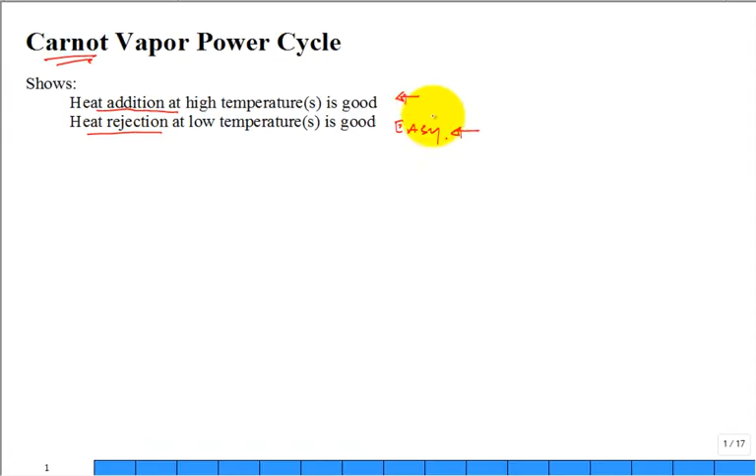But the other one, how you can bring in heat at high temperatures, is a theme that's repeated. And this is where a lot of innovation and adaptation of the cycle comes in. So it's a little harder, more opportunity there. Last time I talked about bringing in heat at high temperature, and the one easy way is to increase the boiler pressure. Increasing the boiler pressure increases the temperature at which you're bringing heat into the working fluid. This has been known for a long time.

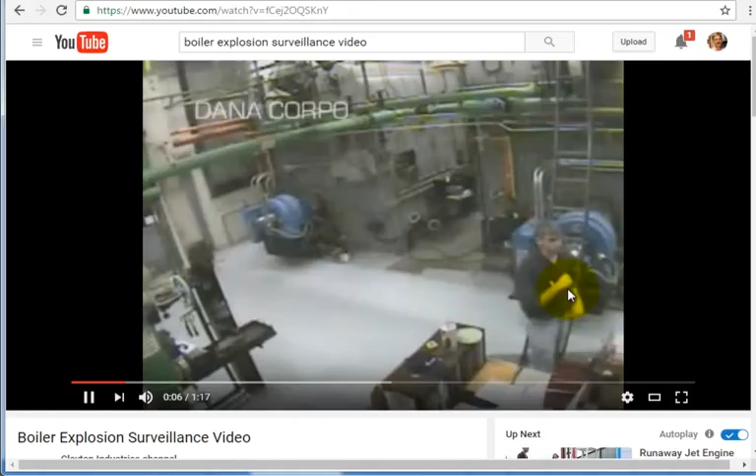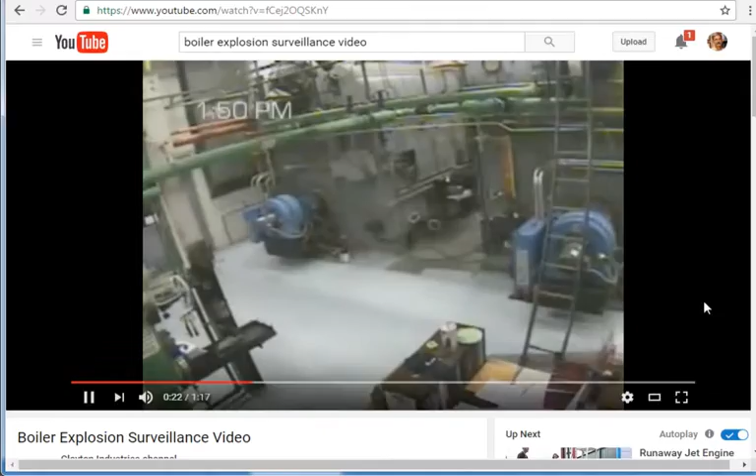Surveillance video. And we'll watch this one. So it's a fire tube boiler explosion. This worker, he's about ready to go to lunch. Hurry up, buddy. Yo-ho, it's time to go to lunch. That boiler's right behind you. He looked at the clock and he is out of there in the nick of time. There was no loss of life. There's the explosion.

And of course, some news video surveillance, I think, is going to come on. It's only a 1:17 video. And there's a side view of the factory, the plant. The safety feature had been disabled. A lot of engineers went and found out why that happened. Yeah, it had been manually overridden. And then, so here's some pictures of it blowing. Let me see. The destruction.

Stop right there. That's the lid on the end of the boiler. I couldn't pick it up. That's where it ended. The other end was shooting through the factory and went elsewhere. But I've read the report on this. Shattered windows in the parking lot, vehicles covered in dust, blown over tree. Oh yeah, if you buy their steam generator, that wouldn't happen. All right, let's jump back here.

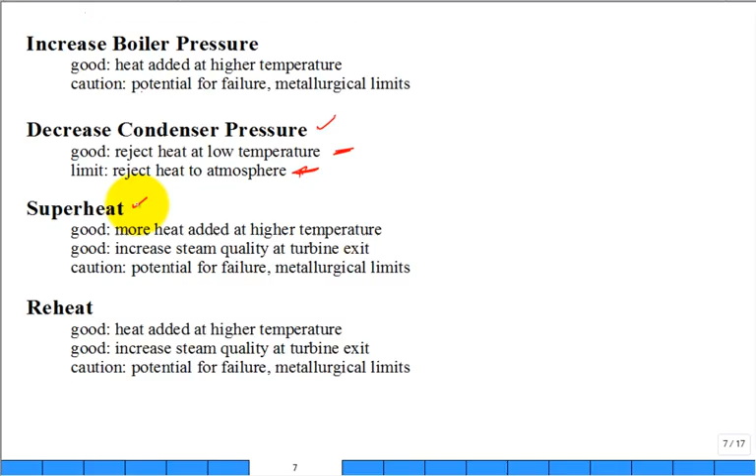So when you can, increase the boiler pressure. That's good. You're able to bring in more heat at higher temperature. What's the caution? You'll see it often. Metallurgical limits. And you have steam at high pressure. It's dangerous, and people have known that. Decrease the condenser pressure. Well, you have to reject the heat to the atmosphere. So although it's good, you keep it as low as possible, but you have to reject heat to whatever the atmosphere temperature is.

The next feature to improve performance is superheat. So on our temperature entropy diagram, we had stopped putting in heat when it becomes saturated vapor. There's a practical concern. When you expand it, even through the best turbine, you get kind of a low quality steam. So 20% or 30% will be in the liquid state, meaning liquid droplets rushing with the vapor. And that's bad on performance for your steam turbine. So what you do is you continue at that high pressure and you superheat. If you superheated it and then expanded it, then it would be better on the turbine.

So from a practical point of view, it's good for the turbine. Increases the steam quality at the turbine exit, so no little water droplets. And it's good because you're adding more heat at higher temperatures. That's good. Caution, there's even more of a potential for metallurgical failure and explosion.

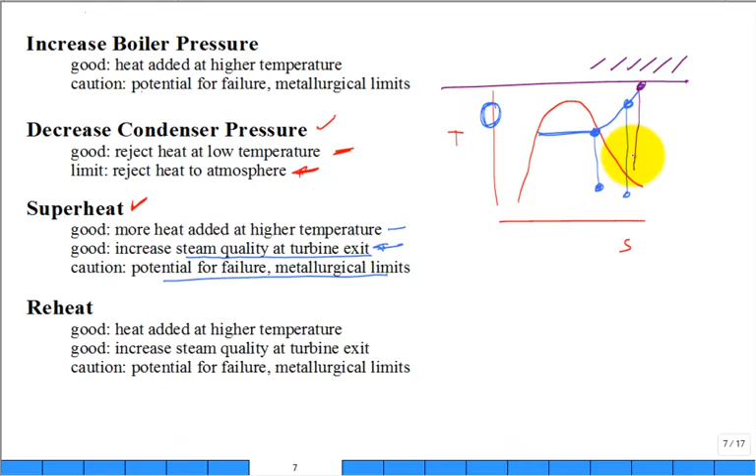And then the next one is if you really have a limit, like don't go beyond here. Well, then bring it up so far and then expand it, but maybe stop the expansion at an intermediate pressure, reheat it back up and then expand again. That's called reheat. So you can see some of the enhancements already, superheat and reheat, to bring in more heat at high temperatures into the working fluid.

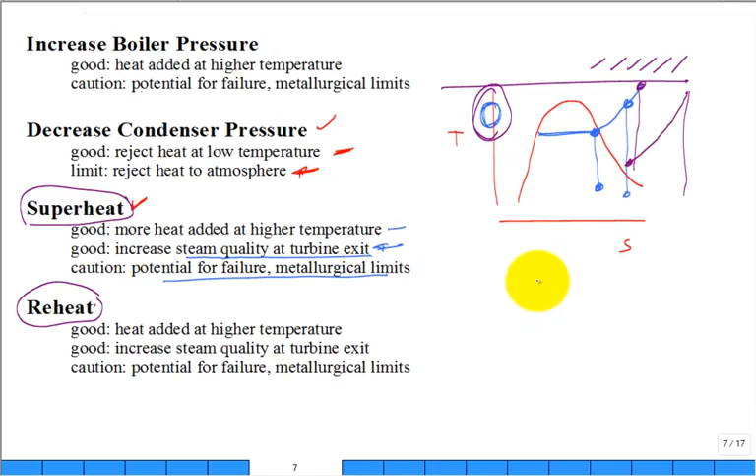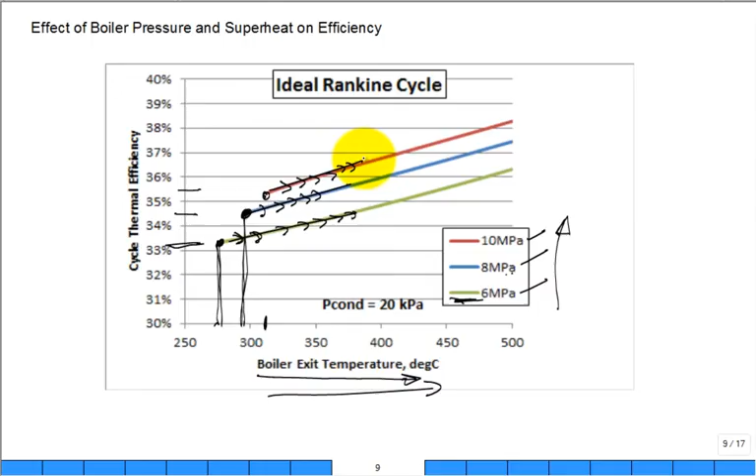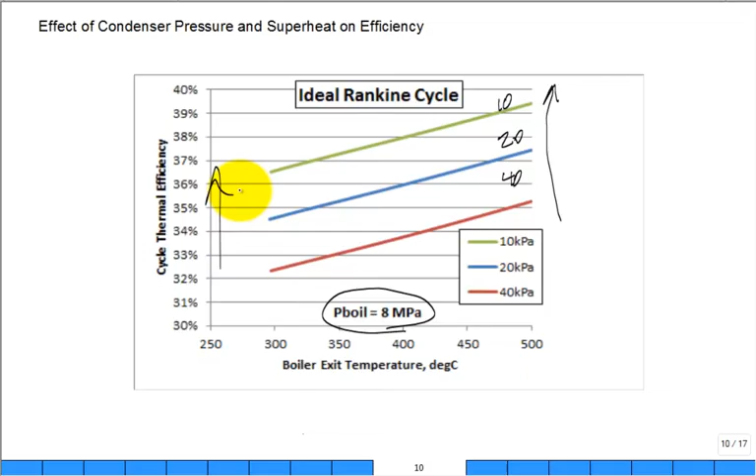You can do the same thing playing with the condenser pressure. Make the condenser pressure low. This is the 10 kilopascal, 20 kilopascal, 40 kilopascal, all for one boiler pressure. And you can see that it improves the thermal efficiency, but you're usually stuck. What is the temperature of the lake or the river that you're going to dump the heat to? And then reheat. Reheat, you have 2 turbine stages.

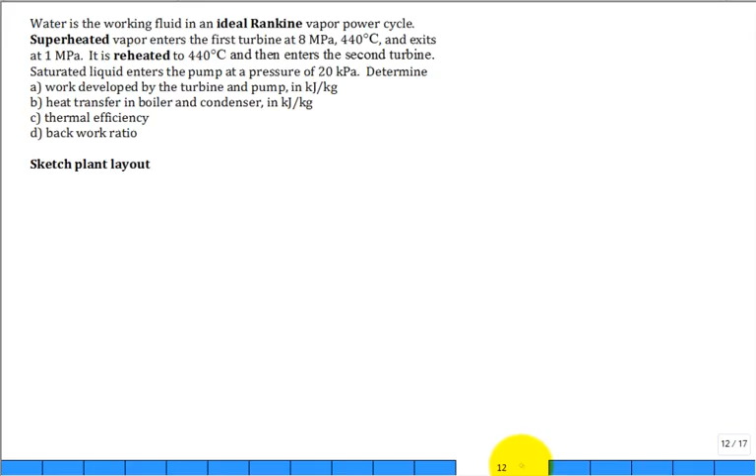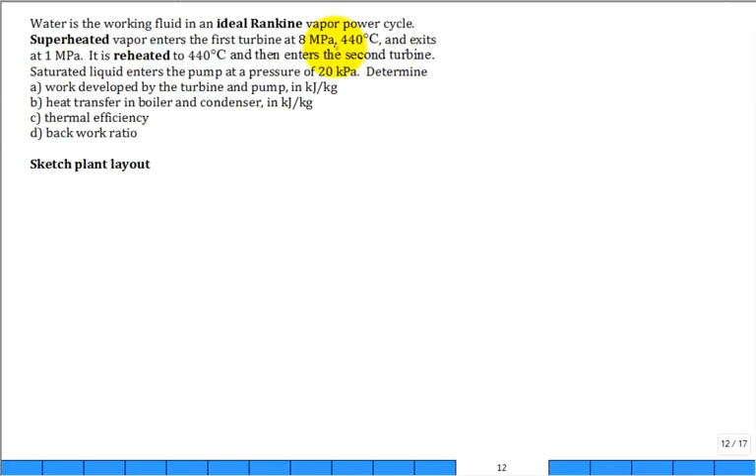Let me work through this problem right here. So I'll read it first. Water is the working fluid of an ideal Rankine vapor power cycle. Superheated vapor enters the first turbine at 8 megapascal and 440 degrees C, and then exits at 1 megapascal. So you're going to have 8 megapascal, 1 megapascal. It's then reheated and then enters the second turbine. So you have a first turbine and then the second turbine.

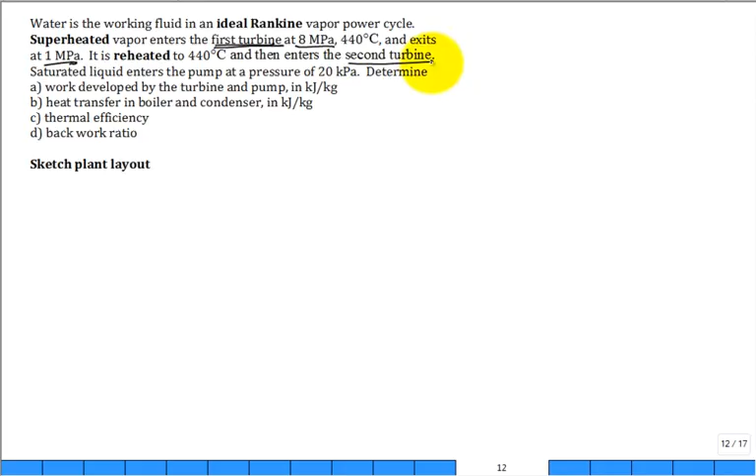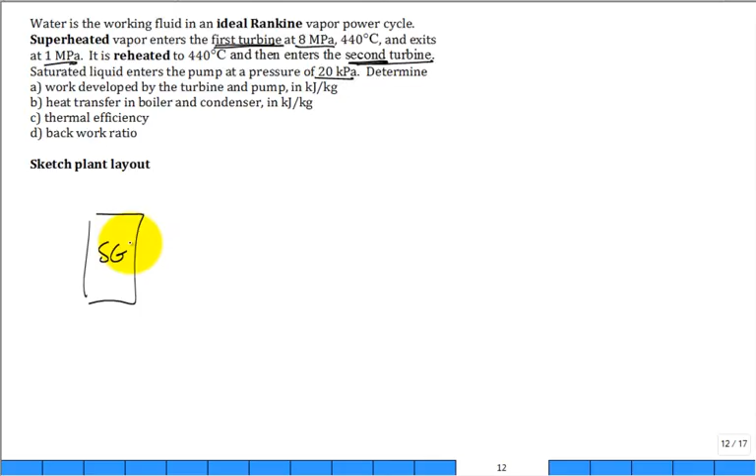And saturated liquid enters the pump at a pressure of 20 kilopascal. So you have 3 pressures now, not just high and low. You have an intermediate pressure in which it's reheated and then put through a second turbine. So make a sketch of the plant. We're going to have basically a steam generator or boiler. We're going to come out and we're going to go through a turbine.

Now, before we go to the second turbine right here, we're going to divert all of the steam back to the steam generator for reheat. Then come over and go into the second turbine. That's really the only big enhancement now of this cycle. You then go into the condenser, and then you go into the pump, and then into the steam generator again. It's like the first pass through the steam generator, and then the reheat's another pass through the steam generator.

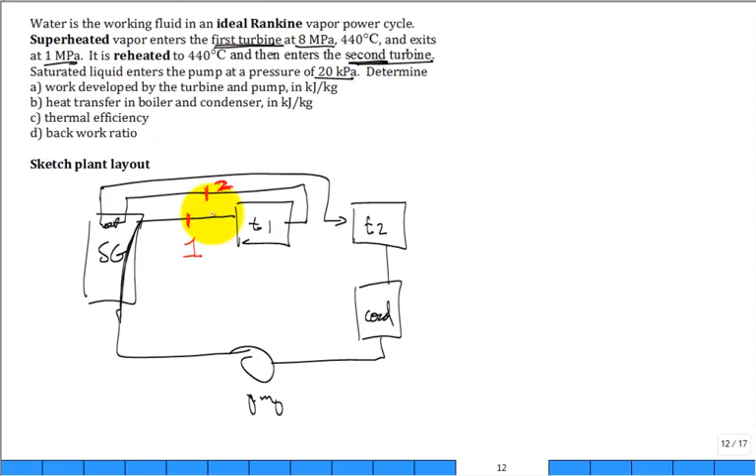So let's go ahead and label some states on our sketch. What comes out of the steam generator and goes into the first turbine is state 1. What comes out of the first turbine going back to the steam generator, state 2. State 3 is after the steam generator reheat. So this right here is reheat. And then state 4 here, state 5, and state 6.

All right? Once I have a sketch of the plant layout, I want to make a sketch of the temperature entropy diagram. So go ahead and put just a bell-shaped temperature entropy diagram like this. And what I'd like you to do is, while I walk around the room, fill that temperature entropy diagram in.

And here's a big hint to start off. How many unique pressures are there in this system? Is there only the condenser pressure and the boiler pressure, only 2? Or are there more pressures? And that'll help guide you. So put all 6 states on a temperature entropy diagram.

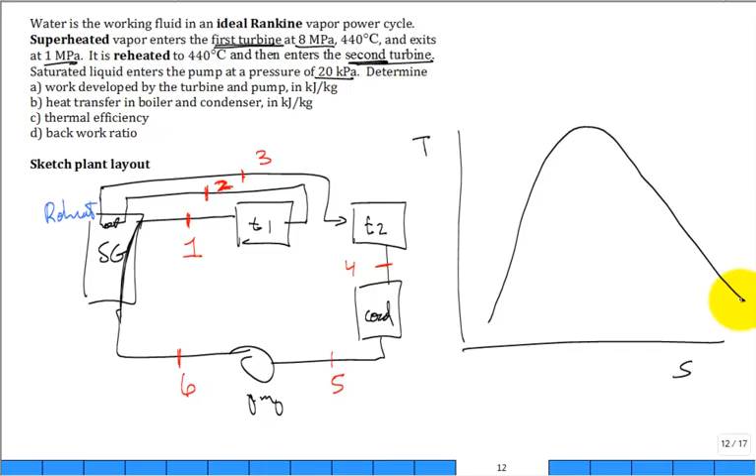So a lot of people have done pretty well. What I'll do is I'll say that we have 3 pressures. The way to attack this is take the hint that I gave you. There's 3 unique pressures. There's the boiler pressure at what? 8 MPa. The reheat pressure, 1 MPa. And the condenser pressure, 20 kPa.

So why not go ahead and draw a line of 20 kPa, 1 MPa, and 8 MPa. So 8 megapascal, 1 megapascal, and 20 kilopascal. True? And state 1 is out here at what temperature? 440?

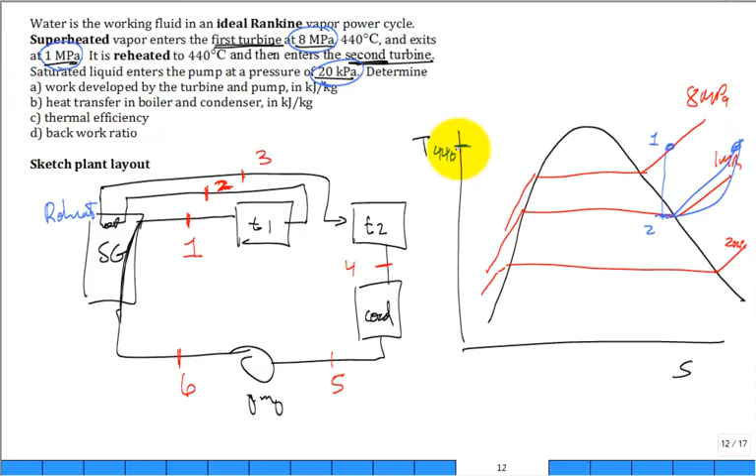And if we expand down to 1 megapascal through the turbine, that's from state 1 to state 2. It'll slightly go inside the dome. Usually you want it a little inside the dome. And then where is state 3? You got to go way back up here to the 440. I didn't draw this diagram too well, did I?

State 3 is at that same temperature, 440. And then we expand down, maybe that's state 4, slightly around saturated vapor. And then we condense it, coming out of the condenser. And then a gross exaggeration, but there's really state 6, and those lines are terrible right there. They're really, really tight together. But there's state 6. It's straight up and down. 6. Okay?

What is the temperature difference between state 5 and state 6? About a half or a 1 degree C. All right? What would be the saturation temperature at 20 kilopascal right in this vicinity? At 20 kilopascal, that's the pressure. What is the saturation temperature? Does anybody remember that? Or look it up, please. That'd be good. Tsat at 20 kilopascal. So it's right around 60 degrees C.

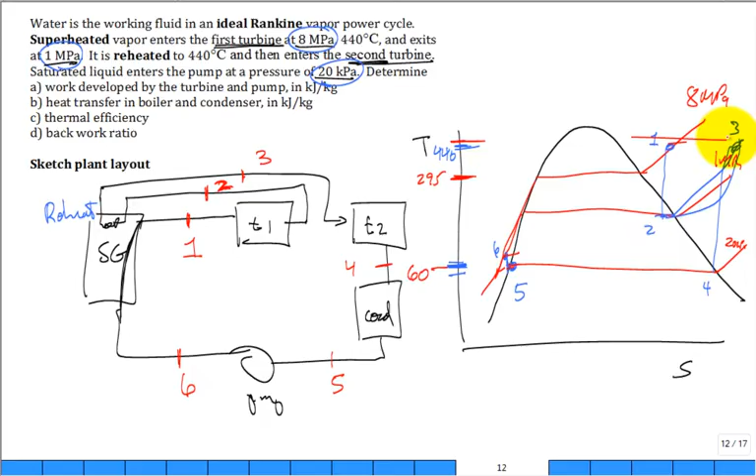At 8 MPa, which is 80 bar, what does the water boil at? Yeah, that's right. So it's right around 300. It's at 295 degrees C. So it's really gross exaggeration. We put state 6, 1 degree C at the most higher than state 5. And yet way over here is 295. And then way up here is 440. I'm not drawing this well to scale, am I? Right? All right. So make sure that you can do the layout.

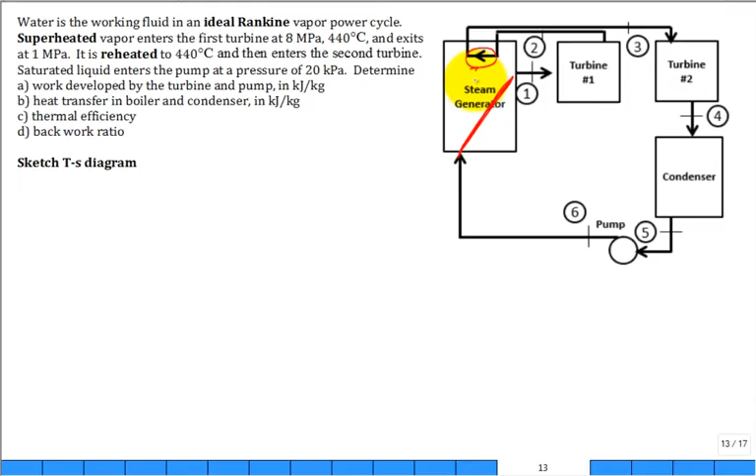So this is the pass through the steam generator. And this is a pass through the steam generator. So the working fluid is receiving heat here as well as receiving heat there. Don't forget that when you compute the thermal efficiencies, etc. And then we know where the pressures and everything are, and we had the sketch. And here is a better temperature entropy diagram. So here is around 440. Horizontal line at 440. Here's a line at 8 megapascal coming down. So right there is state 1, isn't it?

Now we go to 1 megapascal. We got to come all the way down. We're going to do isentropic expansion. There's state 2. This is all drawn to scale now, thankfully for that software RefProp. Then we reheat up to state 3. Then we expand down to 20. Here's the line of 20 kilopascal. Expand down to there. That would be state 4. Over here to state 5. And might as well just put 6 right there too. All those lines, the 10, 20, and 8 megapascal lines are tucked in down there. Okay?

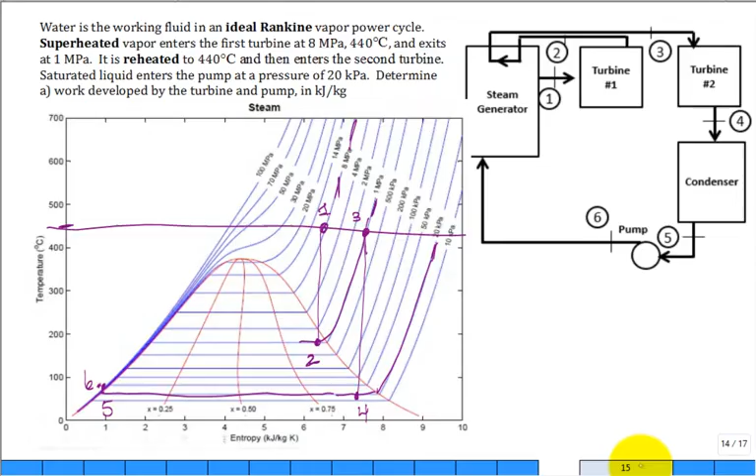All right. Then you make a table of properties, true? And that table of properties, make sure and put pressure, temperature. I like to put them in a standard list. Temperature, pressure, quality, specific volume. We don't need U, internal energy, so skip that one. H and S, and if you wanted to do flow exergy, that's fine as well. And what fixes state 1? Knowing the pressure and temperature. That pressure, that temperature, get the rest of the properties.

How about state 2? I'm not rushing you through this, hopefully. State 2 was isentropic expansion through the turbine. So this S comes down, and pressure and entropy fix state 2, get the rest of the properties, especially enthalpy. Then we reheat, so pressure and temperature. Notice that we're at 1 MPa now, or 1,000 kilopascal. And we back up to 440, so we get the properties. All right. Then we isentropically expand through the turbine from 3 to 4. Pressure and entropy fix state 4, same S.

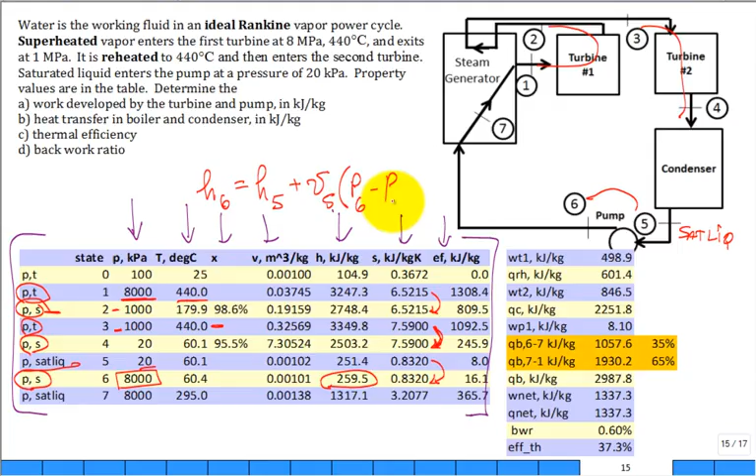Then it's saturated liquid coming out of the condenser at that 20 kilopascal pressure. We put it through the pump. Now, you can sometimes use this S and get the P and S as long as that pressure is in the table for compressed liquids. Otherwise, you just say, I'm going to use VDP to get the enthalpy. So this enthalpy after the pump, H6, is equal to H before the pump, plus the specific volume of the liquid coming into the pump, times the pressure going out minus the pressure going in, and that's assuming isentropic work. It's the minimum work. So let me repeat that. Sometimes you can use the compressed liquid table. Sometimes you can't. Just use the approximation VDP for the work.

Okay. And then 7, what do I show right here? This is kind of interesting. What's that? 7? It's in the middle of that steam generator. Yep, that's right. It's right in the middle of the steam generator. What I'm trying to show is that you come in at about what temperature is state 6? Around 60 degrees.

It's going to go out. State 1, 8 megapascal. What temperature? 440. And there's 3 phases you can think of. It's going to first have to get up to 295 degrees C. Then it'll be saturated liquid at 295. Then it'll go out at 295, get to 295 saturated vapor. And then from 295 saturated vapor up, it will be superheating.

So 295. So you can think of right in here is that you're basically getting the temperature greater than Tsat. Here is you're getting the temperature up to Tsat. So you're heating liquid. You're boiling from saturated liquid to saturated vapor, and then you're superheating, right? So 7 was just an extra state thrown in there, and it's saturated liquid. And you can get the properties at that pressure, the enthalpy.

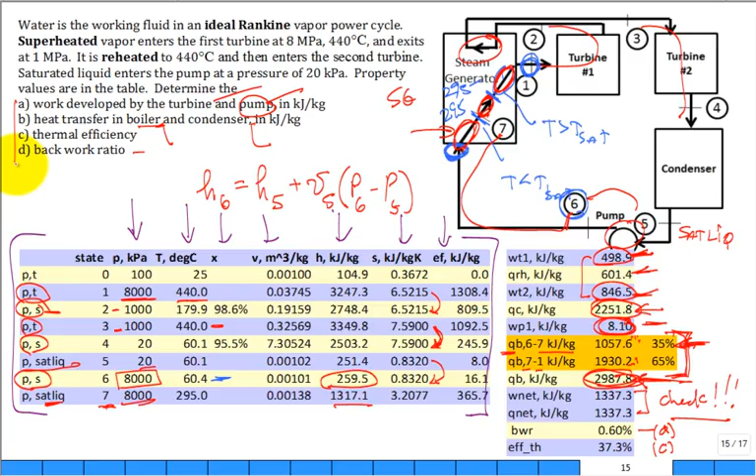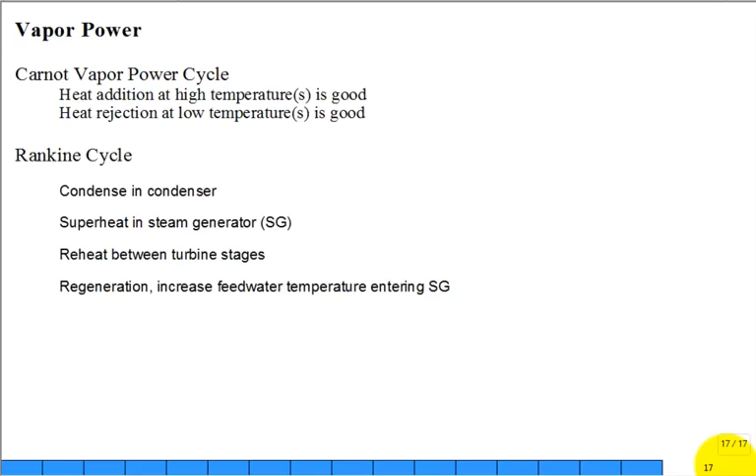But the last efficiency, or one of the last, is regeneration, and we're going to talk about that next time. But at this point, I want to leave you with the condenser. What you want to do in the condenser is condense it all the way, such that the pump gets liquid. You want to superheat in the steam generator. Even if you only have one turbine stage, it's helpful such that the quality of the steam entering the last turbine stage is high. You don't want water droplets in your steam turbine.

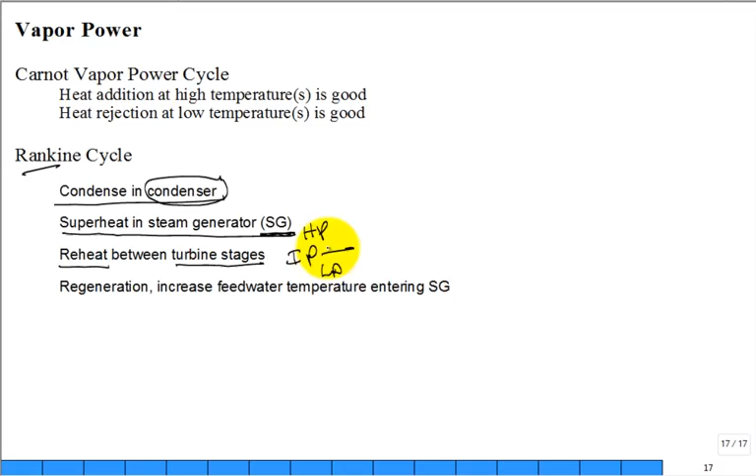And then you can reheat between turbine stages, meaning you have high pressure, intermediate pressure, and then low pressure. Now you have three pressures. That's the third pressure with reheat. And then we're going to move to regeneration. The purpose of regeneration is to increase that feed water temperature that's entering the steam generator. With this prior system, if we just stay with our 20 kilopascal condenser pressure, it's coming in around 60 degrees C. And there's a whole lot of heat just to warm it up, even before it starts boiling.

And the strategy is to get that without using the valuable coal fuel source or natural gas fuel source or whatever fuel source you're using to burn. And so you look at getting a heat source within the cycle, sort of getting it where the steam is still hot, but it doesn't have a high exergy value, but it still has a high temperature value.